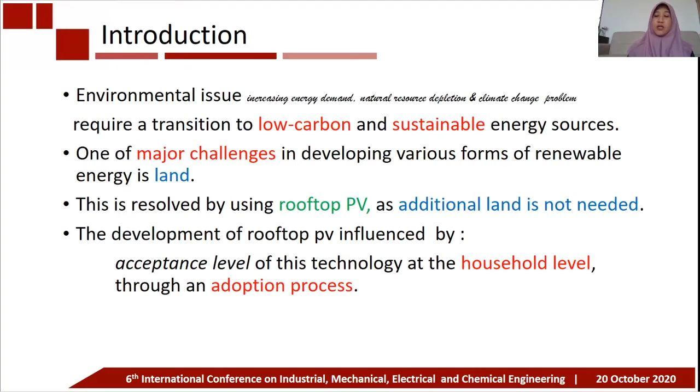Development of rooftop PV is influenced by acceptance level of this technology at the household level through an adoption process. The household as decision maker considers various aspects and plays a unique role in communal decisions. There is a need to assess the decision-making style and different attributes for each household to explore potential policy intervention to facilitate adoption of PV systems.

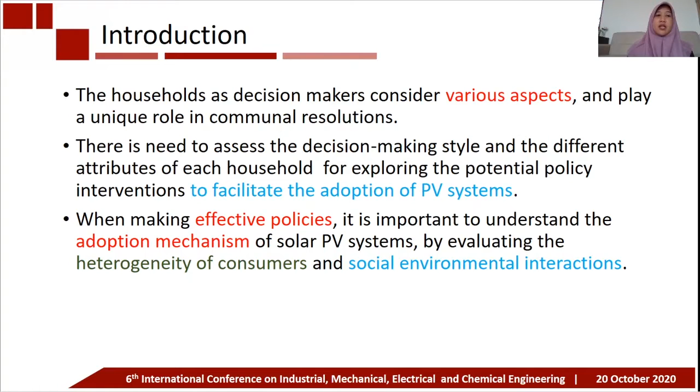When making effective policy, it is important to understand the adoption mechanism of solar PV systems by evaluating the heterogeneity of consumers and social environmental interaction. The most commonly used adoption and diffusion framework is Diffusion of Innovation by Rogers. There has been rapid development in this area of research within the last few decades.

Equation-based modeling and agent-based modeling are approaches widely used recently to model the adoption and diffusion of innovation. This paper aims to obtain a general description of the research progress in modeling adoption and diffusion of PV systems.

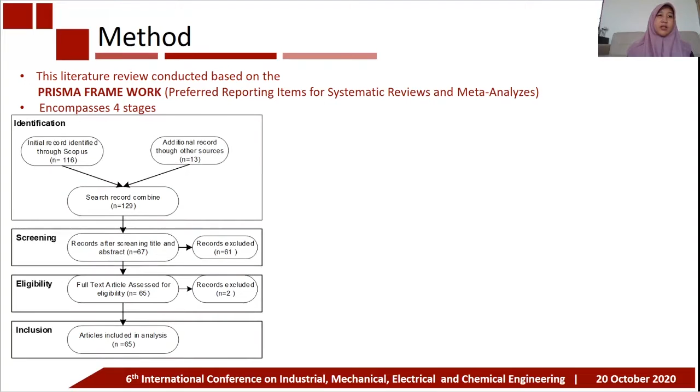The literature review is conducted based on a PRISMA framework encompassing 4 stages. The first stage is identification, carried out through tracking journals and papers on Scopus using a keyword combination of solar, photovoltaic, adoption, and behavior.

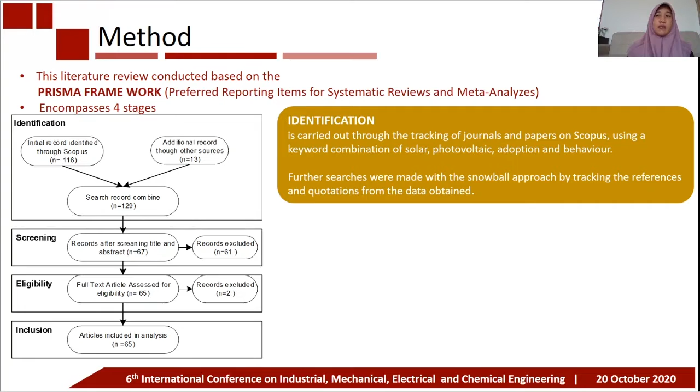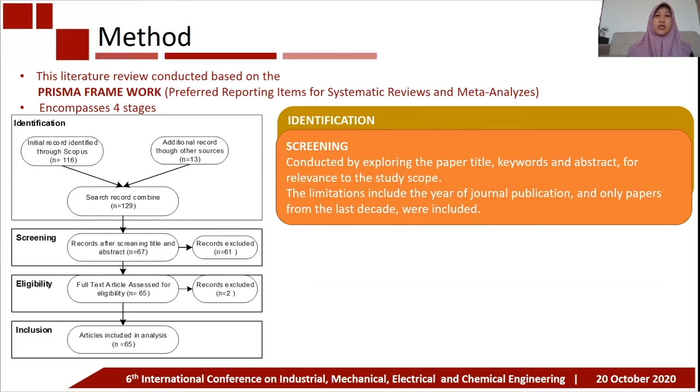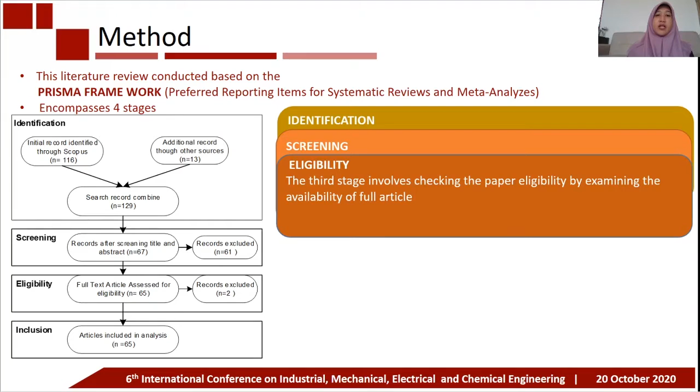The second stage is screening, conducted by exploring the paper title, keyword, and abstract for relevance to the study scope. The limitation includes the year of journal publication. The third stage involves checking paper eligibility by examining the availability of the full article. The last stage is inclusion, where attention is focused on the modeling of PV system adoption developed in the paper.

A paper search related to PV system adoption through the Scopus database produced 116 papers. The first article was discovered in 1986, with a steady increase over the years in line with the growing use of PV.

After screening and eligibility check, only 65 remained for further analysis. Most of the papers discuss PV system adoption in Europe and America. This finding agrees with the rapid PV system development in countries with 4 seasons, sufficient sunlight, and not too high temperature, the optimal conditions for PV utility.

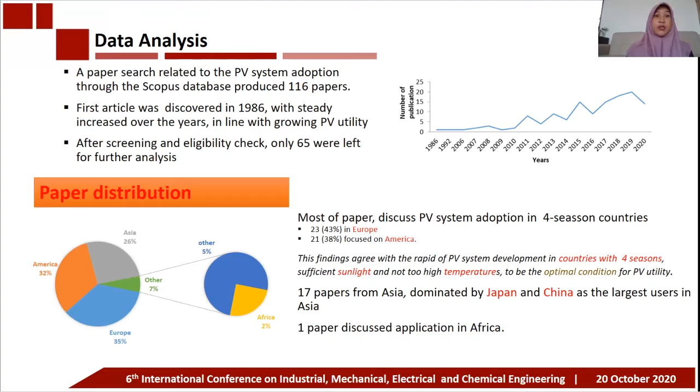17 papers were from Asia, dominated by Japan and China as the largest users in Asia, and only 1 paper discussed application of PV systems in Africa.

We then classified the papers based on qualitative or quantitative research. From the 65 papers, 13 focus on qualitative research. Surveys, reviews, and interviews were used to explore various motivators, behaviors, and customer behavior in adopting PV systems.

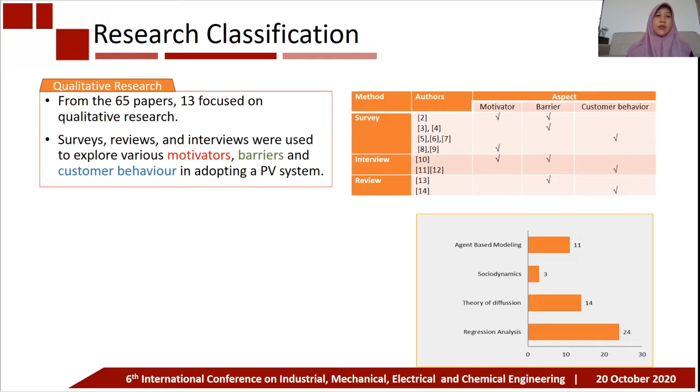52 are quantitative papers which model the adoption of PV systems with various approaches. EBM is the dominant method compared to ABM. EBM is characterized by various underlying theories, and the most popular basic equations are theory of diffusion, regression analysis, and sociodynamic.

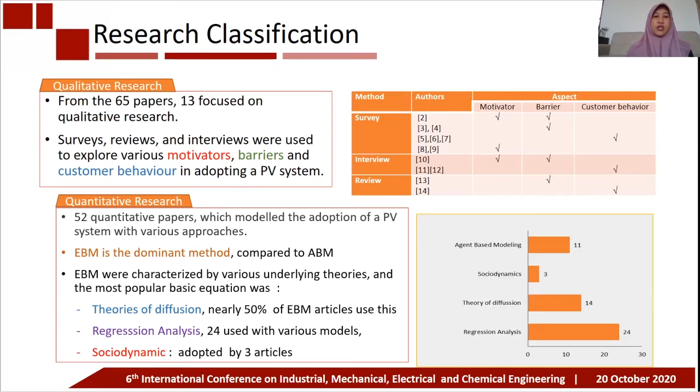Based on Candas, we classify the approach based on the ability to cover the complexity of social behavior and the ease of data collection. Agent-based modeling has a good ability to cover the complexity of social behavior but has high difficulty in data collection. In contrast, regression analysis is easy to collect data but less able to cover the complexity of social behavior.

Sociodynamic approach tries to simulate adoption patterns at a macro scale using techno-economic data, easily accessed without compromising important social dynamics.

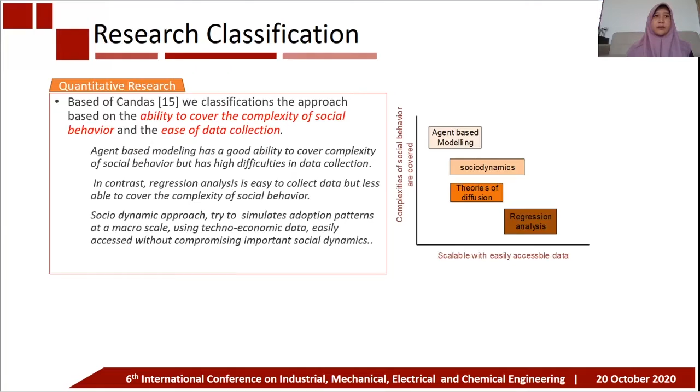Equation-based modeling recognizes two kinds of entities, individual and observable, each with a temporal aspect. This model is initiated with a set of equations expressing the correlation between observed variables. Further evaluations produce evolution of observables over time.

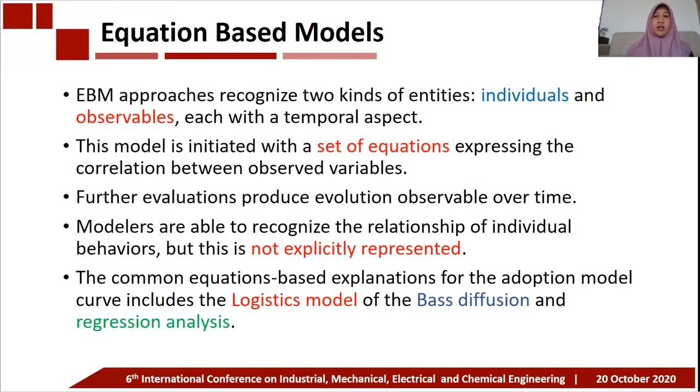Modelers are able to recognize the relationship of individual behaviors, but it is not explicitly represented. The common equation-based explanations for the adoption model curve include the logistic model, the Bass diffusion model, and regression analysis.

ABM explores how individual patterns interact with each other during the decision-making process. This is used to investigate the adoption behavior of individuals in order to obtain a model overview on a broader scale. The recognition of numerous modeling with ABM raises questions concerning the type of ABM approach suitable for modeling PV system adoption in the household sector.

In addition, the suitability of various approach types is assessed by exploring the theoretical and empirical basis of ABM decision rules, and also from agent initiation and social network structure.

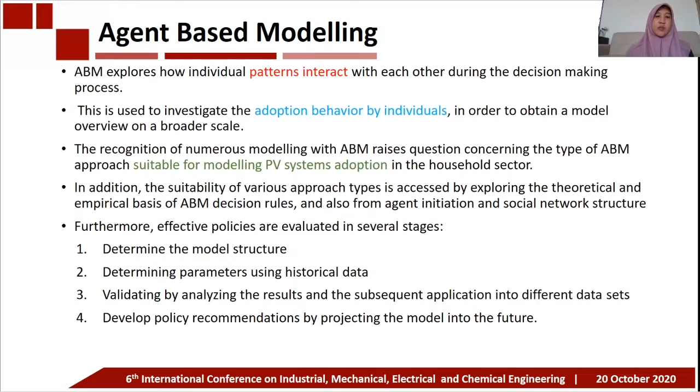Effective policy is evaluated in several stages. First, determine the model structure, determining parameters using historical data, validating by analyzing the result and subsequent application into different datasets, and finally, develop policy recommendations by projecting the model into the future.

ABM is an alternative in overcoming deficiencies of EBM, with its ability to describe heterogeneity of household preference, communication, and social influence in decision making. It also has flexibility to explore the effect of various policy interventions on adoption rate.

By using parameters from empirical data which are calibrated and validated, it can produce the same accuracy as equation-based modeling. The difficulty in building ABM is the excessive data requirement.

This problem is possibly overcome by transparency in modeling design and assumptions, and also by adaptively building an empirical database for greater accuracy. This causes the limited ability to provide predictions only under the conditions specified in the model. This shows the importance of setting the predicted conditions.

There are many approaches toward the empirical parameterization of ABM, including survey, interview, direct observation, and expert knowledge. It is highly recommended to use a theoretical framework for ABM development in simulating technology diffusion, e.g. diffusion model and TPB.

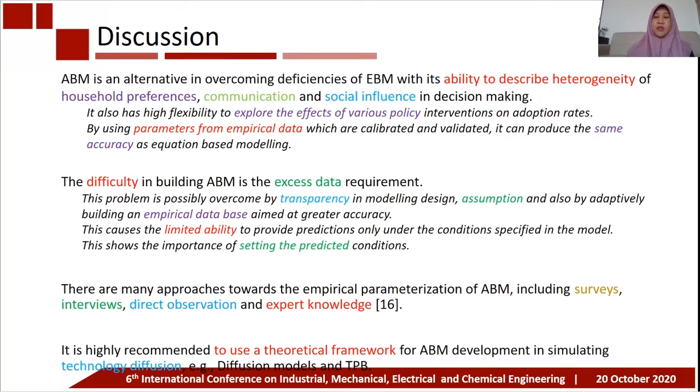And we can make a conclusion. The decision-making process for rooftop PV adoption by households is a complex problem influenced by various factors including technological performance, social network, and values and beliefs.

EBM is able to describe the diffusion of PV systems, but it cannot describe household heterogeneity. ABM, supported by a theoretical framework, has the ability to overcome some of this limitation and provide insight into the dynamics of behavior related to household adoption of PV systems.

ABM also has a better ability to represent population diversity, incorporate behavioral aspects, and integrate consideration of social network influence. Therefore, ABM can help policymakers target programs for PV system adoption, although ABM has limitations in understanding the dynamics of technological diffusion under circumstances of insufficient empirical data.